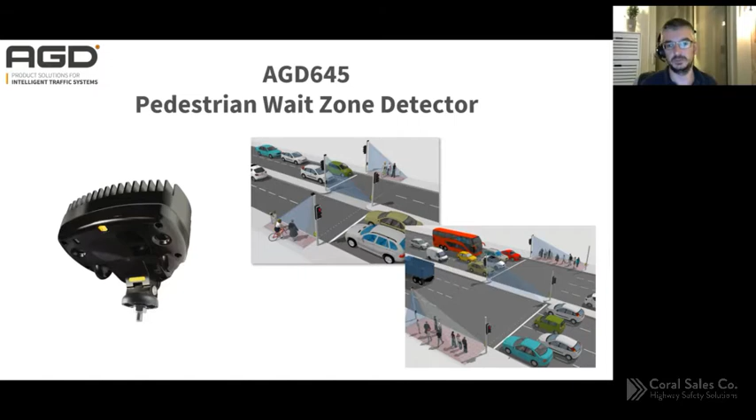Okay, so we'll jump in. This is the AGD 645. You've probably already seen pictures of it. It's a pedestrian wait zone detector. So at a glance, this is the AGD 645 - you can see it's a stereo optical sensor.

That means it uses a dual camera arrangement, very similar to the way our eyes work. We have a left picture and a right picture, and from the differences between those two pictures we can work out depth perception, things like that, which enables us to reliably detect both moving and stationary targets.

Detection zone size is 33 foot by 10 foot, which is quite sizable when we're looking at crossing sizes. A 33 foot crossing is very suited to city centers, built up areas, downtowns, that sort of thing. As I mentioned, we've got them outside colleges, sports grounds, schools - that's the typical application for these detectors.

As I mentioned, we can do stationary and moving targets with this unit. Because it uses vision over any radar-based technology, we can detect stationary targets reliably every single time with this unit.

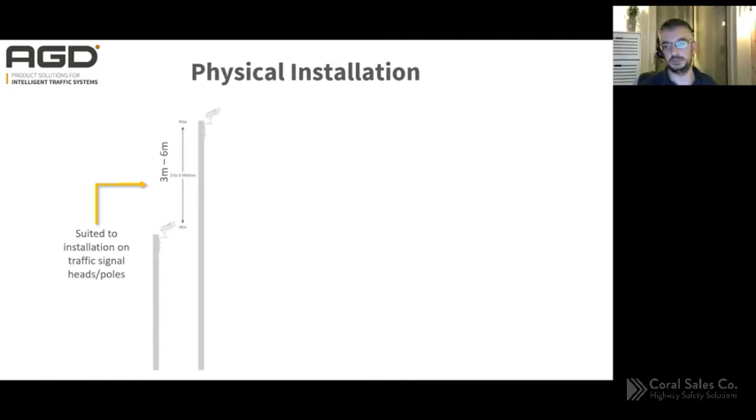Mounting height wise, we're talking between 3 and 6 meters, about 10 to 20 feet. What we found is normally we tend to mount it a bit higher when we're talking about big crossings, just to ensure that we get maximum coverage out of the unit.

As with anything, we need to make sure there's an unobstructed view of the zone. Anything that is in the vision of those dual cameras may affect this operation.

Just a quick note, an expanded view there. What we try and do is make our products as simple to install as possible. So you can see there, we just have a single bolt to do up there to mount the unit securely. It's quite sizable, that one. You can see we've actually incorporated some alignment marks into the casting of the unit as well.

Again, we try to be thinking safety. We try and keep any ladder time as small as possible. The alignment mark there is part of the casting, and we just have a single nut to do up, just to keep that ladder time to an absolute minimum.

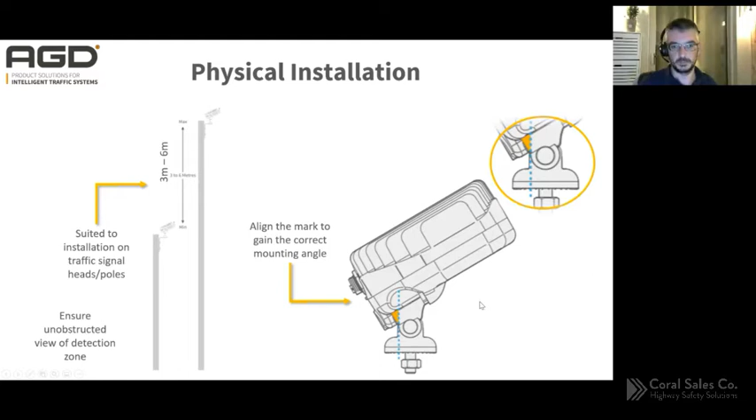As I mentioned previously, this along with our other units all use the AGD Touch-Setup, so it's a Wi-Fi based setup of all the units. It's safer than traditional methods, cabled connections, climbing ladders to alter dip switches. The good thing with this as well, there's no additional software required. The unit is commissioned via a browser window.

We've actually had instances in the UK where people were buying our products and not being able to set them up because their IT department wouldn't allow them to install the software on their devices. So that's why we use the browser-based method to make sure no one has those issues. Any device that has Wi-Fi and a browser installed - laptops, mobiles, tablets, pretty much anything in between - as long as they have Wi-Fi and a browser.

We'll go into this a bit more. It's very simple: we connect to the Wi-Fi network, we launch a browser, type in an IP address, and that opens up our pages for the commissioning of that unit. Any queries on that, anyone, before we move on?

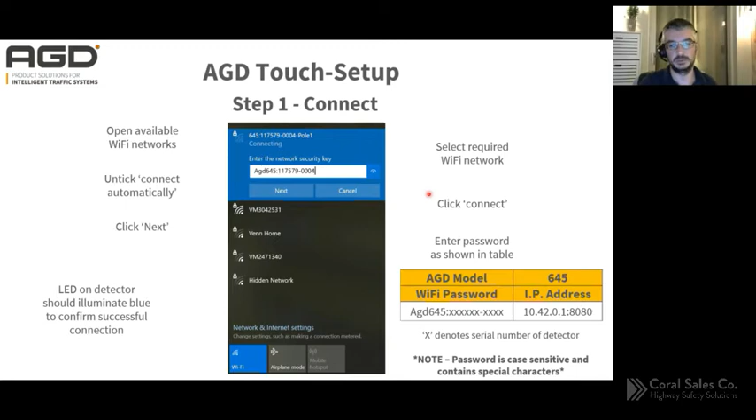Then step 2 is we launch a browser. You can see there Safari and Chrome both supported, 2018 onwards - those are really our two recommended browsers. Others are available, but we tend to recommend Chrome where available. What we do is type in our IP address exactly as is shown here, and hit enter, and that takes us into the interface of the unit.

Dean, we have a quick question - what if there's no local Wi-Fi in the area? The unit broadcasts its own Wi-Fi network, so we're actually connecting to the Wi-Fi network of the unit rather than a public network.

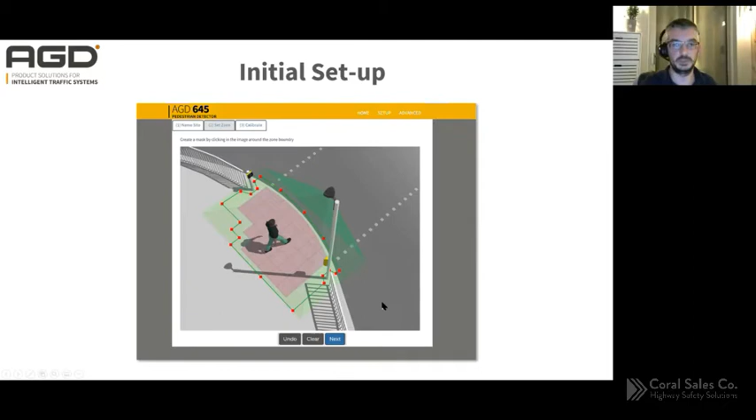We'll just skip through this, I don't think there's any real need. Just a close up there of mapping around that pole, which you've seen pretty clearly on the previous slide. We have undo buttons, so if any mistakes are made, you can simply go back and start again, no problem.

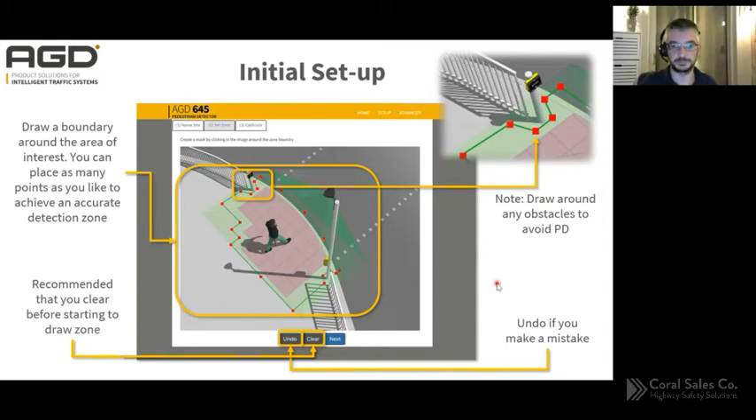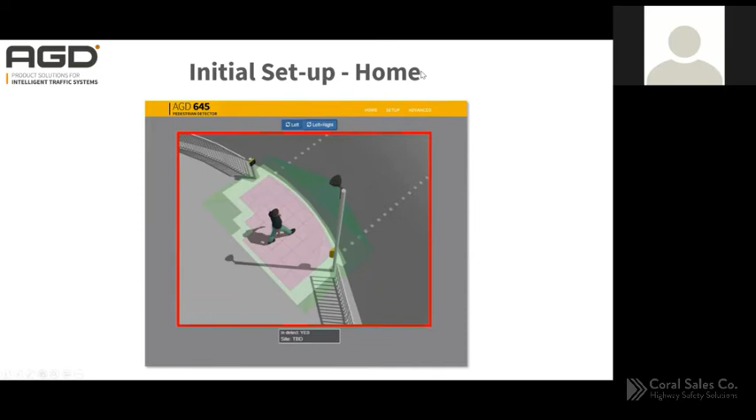Sorry to interrupt, Dean, but there's been a question from Erin: can you put a hole in the middle of the zone in case of street furniture? So I guess maybe there's a waste bin or a trash bin in the middle of the wait zone — can you mask that out?

What we would need to do in that case — you can't put a hole as such, but what we could do is, say our zone where we put a point at 12 o'clock, we could move down to the center of the picture, map a hole in the center, and then go back up as close as possible. It's a bit difficult to explain, but yes, you could do it is the short answer. There may be a little dead spot just above the trash can, for example, or the post, whatever it is, but there is a way you could do that.

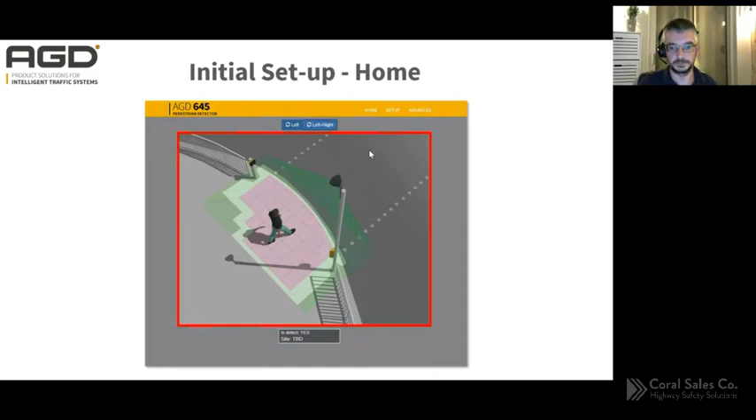Okay, as I mentioned, just a quick walk test. We have two visual indicators. So when the unit's in detect, there's a nice bright red outline to the picture, as well as a change in state in the wording down there as well.

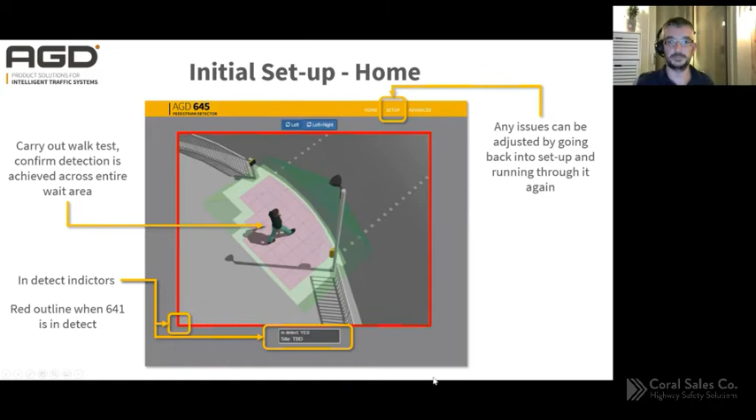Sorry, just reading the chat as we go along. Also, you have the option to redo the setup at any point if needed, or if you return to site and find that it's not quite right, or you're experiencing issues there as well. So what I will do is, sorry, just make sure - Erin, are you okay with that explanation on the mapping of the hole, or do you need it?

All right, lovely. Okay, so as I mentioned, the 645 has an occupancy mode. What this does is it looks at the amount of traffic in the detection zone, and it gives us a low, medium, or high output depending on that traffic.

So I think a couple of good pictures here, which will explain it better than I do. You can see the picture on the left-hand side here. There's probably four and a bit targets in there - that will give us a low output. A couple more targets, 5, 6, 7 - so we're looking at 8 targets there, and that would be a medium output.

And as Brian quite rightly mentioned, when it comes to school leaving times, a concert finishing, or a sports event finishing, when we have a dramatic rise in the amount of footfall, that is when this unit tends to work at its best. When you have that massive rise and fall in footfall, the extra bodies in there will actually put that into a high occupancy.

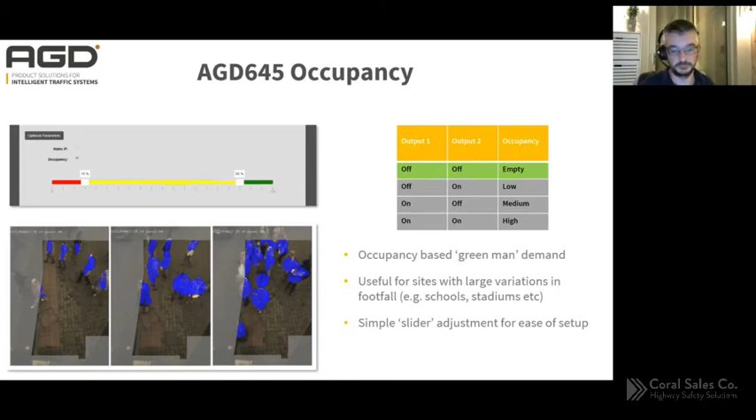It's not capable of extending the pedestrian time. What the unit does is, if we have one person enter the zone, it will go into a detect state. If more people enter that zone, it will switch to a medium output, if there's enough people. And similarly, if more people enter again, it will switch to a high output. But this just detects those pedestrians waiting to cross, so it doesn't extend anything. What it does is change the outputs according to demand, and it's the controller's responsibility then to adjust crossing time accordingly.

Is that okay? Just to perhaps reiterate the point there, the controller itself does extend the crossing time. So it looks at the output, depending on whether it's low, medium or high, and then will extend the crossing time accordingly. So I guess the answer is yes to your question, Adam. It's the controller that does it, not the sensor itself - the sensor just provides the outputs to the controller. Does that answer your question, Adam? Okay, good, thank you, excellent.

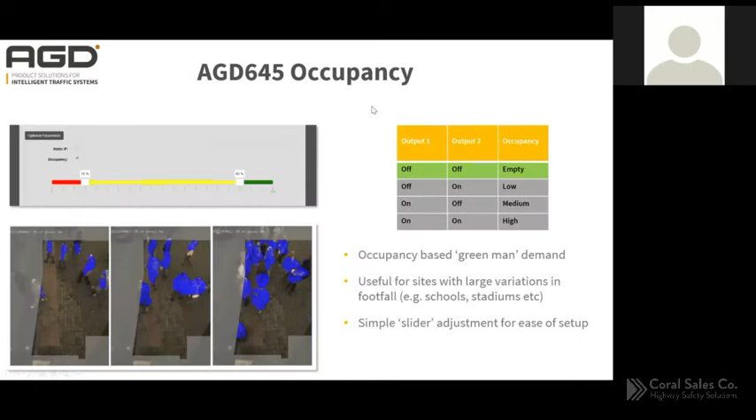So, as I mentioned previously, we have a remote monitoring capability. We can actually take live video off this unit and feed that back to a central control room over a network connection. We're not able to stream it over Wi-Fi, just in case anyone asks that, unless we have a dedicated device on there. But yeah, it's obviously capable of providing live video feed all the time via a wired connection.

I don't know if you can see in the background, there are some data analytics available there - I think we might have a little screenshot on that. If not, there's a number of things like percentage of time in detect, and I think it provides outputs per 15 minutes on percentage of time in detect and things like that. So it does help with some analytics if that's required.

As I mentioned, reduced fault finding visits as well, so we don't actually need to go to site if there's an issue with a unit. We can simply connect to the unit and see if there's an issue with it, and we can make any adjustments remotely as well if that's required.

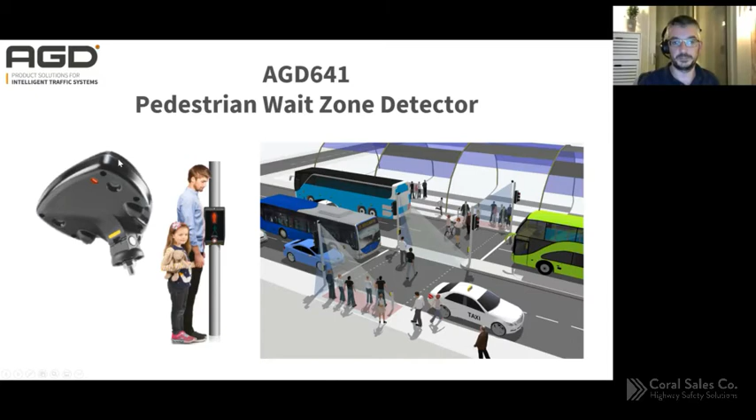Again, exactly the same technology where we use a dual camera system. As you can see, the detection zone in this unit is significantly smaller, down to a 13 foot by 6.5 foot detection zone. What we found is this will satisfy the majority of crossings, and is certainly more suited to our more rural crossings and things where we don't have that large amount of footfall.

So yeah, again, flexible polygon tool, we can detect stationary and moving targets for this. We use exactly the same Wi-Fi method for connection and commissioning. This unit actually has built-in infrared illumination as well.

So again, it is more suited to those more rural locations where the street lighting may not be as good, or there could even be no street lighting at all. So we have that infrared illumination just to make sure that the low light performance is what it needs to be.

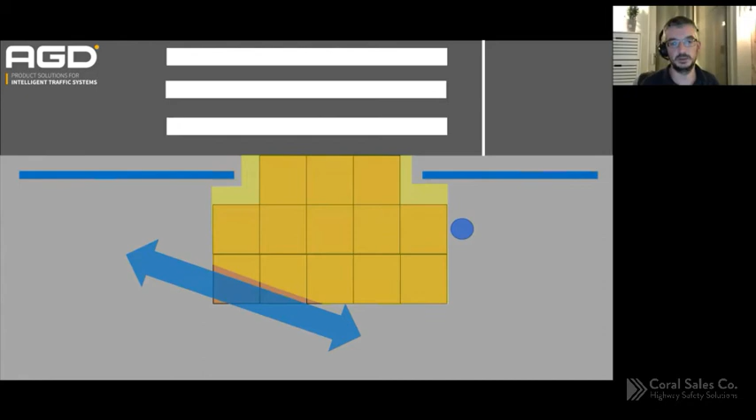Okay, and again, this should be very familiar to everyone. Exactly the same setup, obviously we have our smaller detection area here. What we've done is introduce some street furniture here, and what we can do is, if we find that foot traffic is imposing on our wait area, we can effectively mask that out, so we can stop the unit detecting when there is no need to.

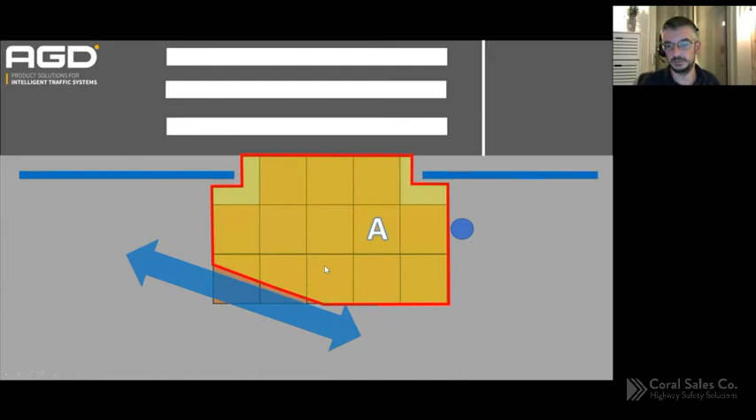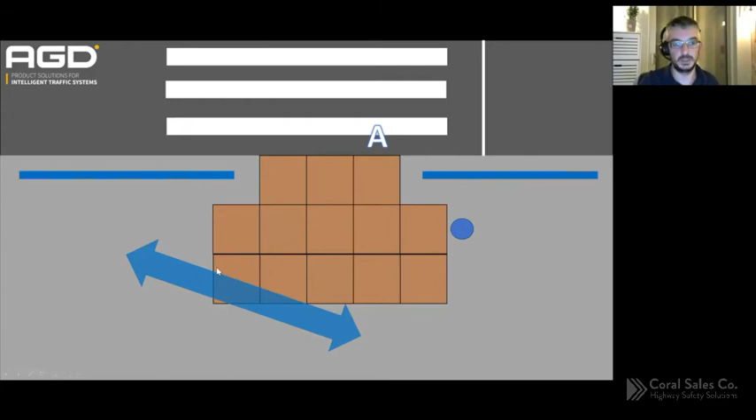Obviously, what this does is when we have a target enter, you can see the unit goes into a state of detect, signified by the red box. And when it comes time for that target to leave, to undertake its crossing, the unit will then revert back to its normal state. Again, I won't go through this, but it's exactly the same method of setting up, where we connect to the Wi-Fi network, we launch a browser, and we commission the detector.

The interface on this is pretty much exactly the same, bearing a few options. Obviously, if anyone gets their hands on it, we find that keeping our interfaces very similar makes the installers feel a lot more comfortable when it comes to using it. There's nothing really that they're not expecting or that they've not seen before.

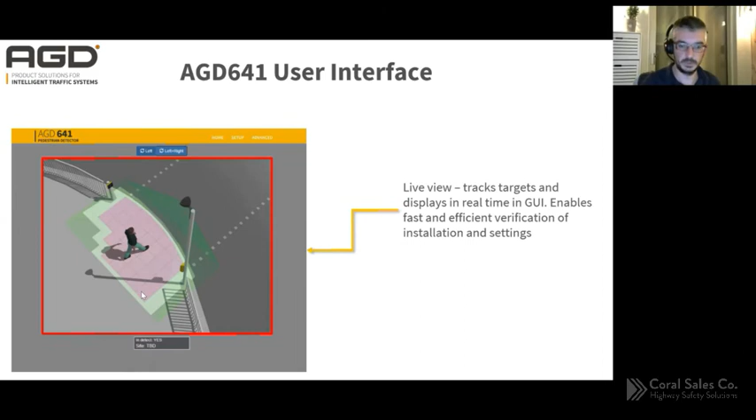And again, there is a live view available on this one, but that is only available via that Wi-Fi connection. And again, exactly the same mappable polygon tool as I've shown you in the 645 as well. So the main difference is that detection zone size, and we've stripped out the IP connectivity, the occupancy mode, just to enable us to provide that low cost, high performance unit.

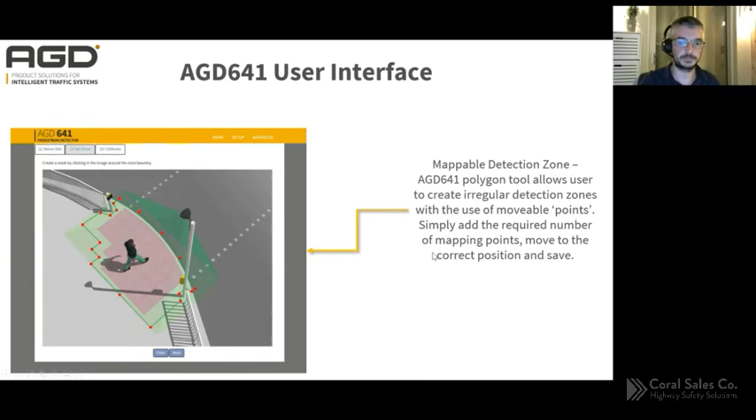And the last one is our 326. So this unit is a radar based unit, and it is designed for detecting targets when they're actually undertaking that crossing phase.

So you can see there, being a radar unit, it does require movement to work, but this will detect targets down to, I've got less than 1 mile an hour there. I believe it's down to about 0.9 mile an hour.

We use 24 gig radar technology, which makes it suitable for international deployments. If I remember rightly, Brian, I think this is undergoing NEMA testing currently, isn't it? Yeah, that's correct, Dean. It's going through NEMA testing in a lab over in the States at the moment. We hope to have that testing finished probably, well, certainly by Christmas, if not earlier.

So, again, exactly the same Wi-Fi setup on this unit. Obviously, the interface is different, considering it's now a radar-based unit, but the method to connect is exactly the same.

And range-wise, this unit is adjustable for length and width, and it can do 79-foot length by 33-foot width. So again, one of our very basic crossings.

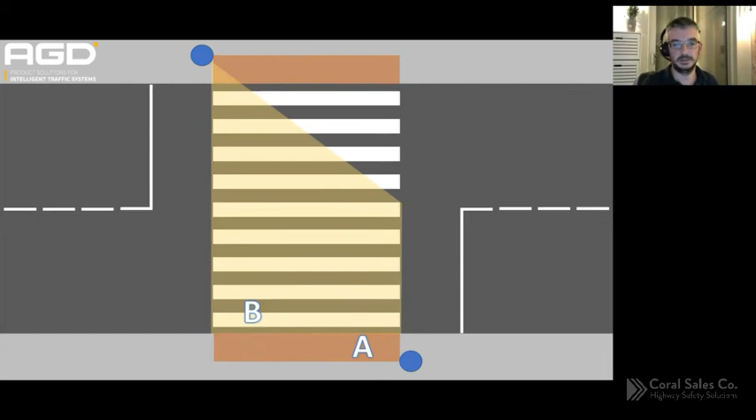Okay, so if we take, for example, our slow-moving target, our little old lady, as target A, and our fitness freak jogger as target B, what happens when they get the invitation to cross? B is straight off the mark, he's onto the crossing, and he is immediately picked up by the unit on the opposing side of the road.

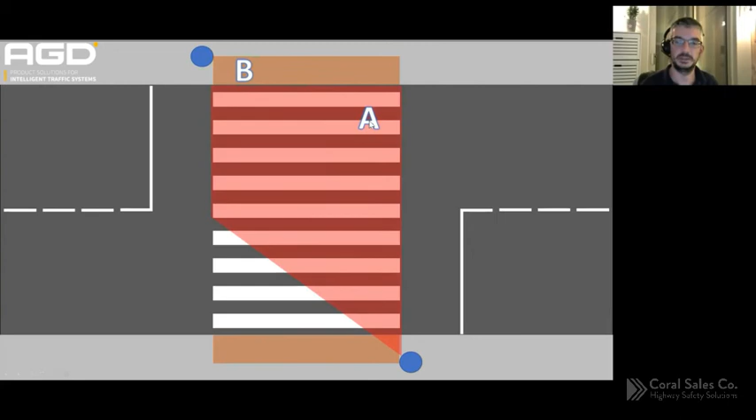Second phase, you can see there what we have is both detectors picking up both targets, and similarly in the next phase as well. In the final phase, B has now exited the crossing, but A is still on the crossing, and she is continuing to be detected by the unit that's behind her. A has now exited the crossing, and both units are now out of detect.

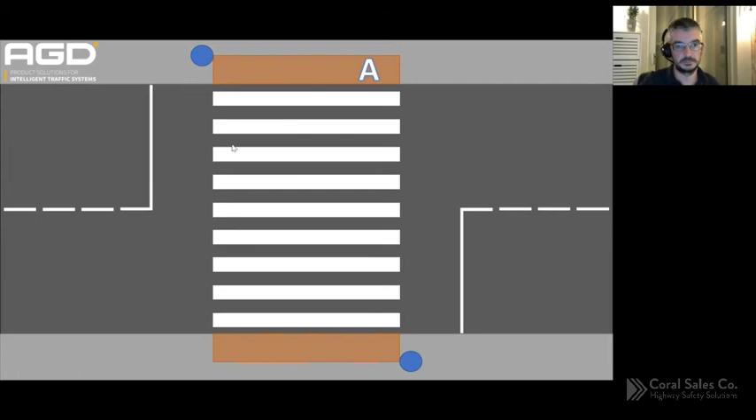Okay. Do you want to answer Erin's query there, Brian? If that's okay. Maybe we save that for the end and do it by the chat method rather than talk. You carry on. Okay, no problem.

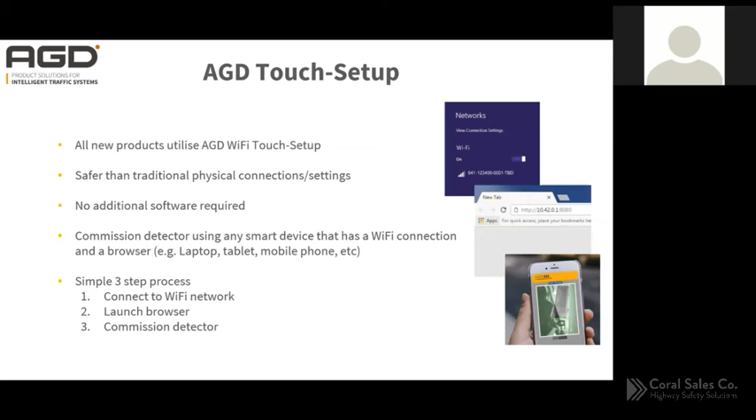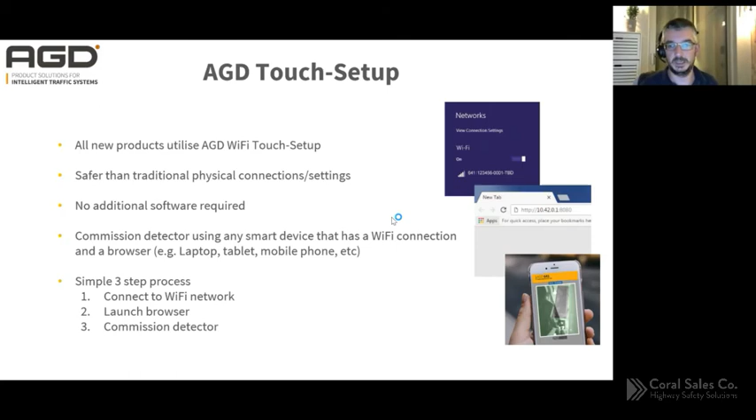So again, obviously we put this in just for information. Again, exactly the same method of connection for this unit. The only difference is the password that you put in is in a slightly different format, and the IP address that you put in is different. But other than that, it's exactly the same.

Our detection tracks, you'll see in a video that's on the following slide. As I said, we can actually do a live view on this. The detections are shown as little red dots, and we can turn those on or off. We always leave those on. It's very handy when it comes to doing our checks to make sure that the unit is performing correctly.

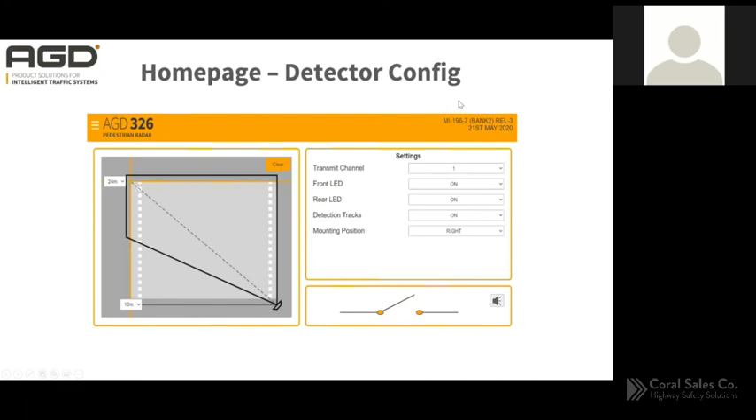Dean, I'm conscious that we've only got a couple of minutes of our allotted time left. Yeah. Probably at the point, I think there's only one more slide after this. Yeah, I was just going to say we've got the video and we should be pretty much done then. So if I just run through the video, we don't need it all, to be honest, Brian.

So we just mute that as well because the buzzer is quite annoying. What we do, just to give everyone an idea, you can see how easy it is to interact with this unit. What I will do is just skip forward a bit. That's one of my colleagues just doing a little check.

So what we're doing is a walk test on this unit. We can see we're starting in the opposite corner, and you can see immediately that the target is picked up and the unit is tracking his movement all the way down that center line, all the way to the unit.

Once that's done, we'll just have a little skip—no need to see all of this. This is part of our testing procedure. We just like to be thorough, making sure our units do exactly what they say they're going to do.

You can see the red dots appearing as the unit is tracking him again, all centered down that near edge. Just making sure the unit is accurate and doing what it should. Similarly, we do a walk test up the center.